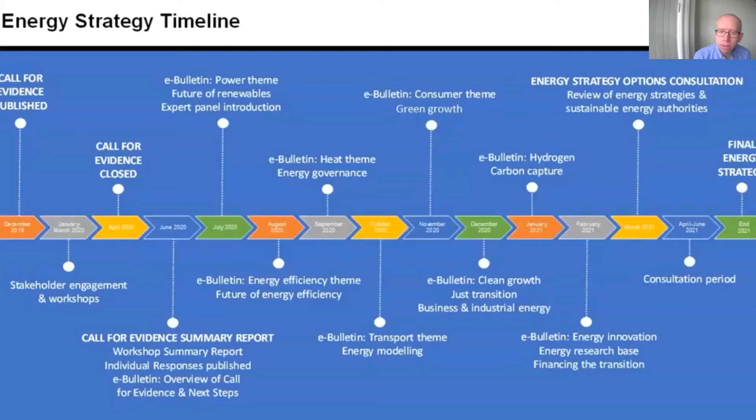Just to cover a few key issues we're looking at within it: the big area of success we've had over the last number of years has been in renewable electricity, where we've taken a power sector that was originally based on around 3% renewables and taken it to a position where it's at 48% in June 2020. That's a fantastic achievement, and it shows what good policy and collaborative working across government and with industry can deliver. That's a good example of the success we've had. We really need to build on that as we take forward the future energy policy in the energy strategy.

But we do have to be clear that power is actually a relatively small part of the energy mix—it's 16% of our total final energy consumption. Transport and heat are really important areas that need to be tackled through the energy strategy. Indeed, when we look at a breakdown of greenhouse gas emissions by sector, we see that energy-related sectors account for 66% of total emissions. That's why the energy strategy, why energy policy, is so important for net zero, because ultimately an awful lot of the heavy lifting will be done by the energy sector.

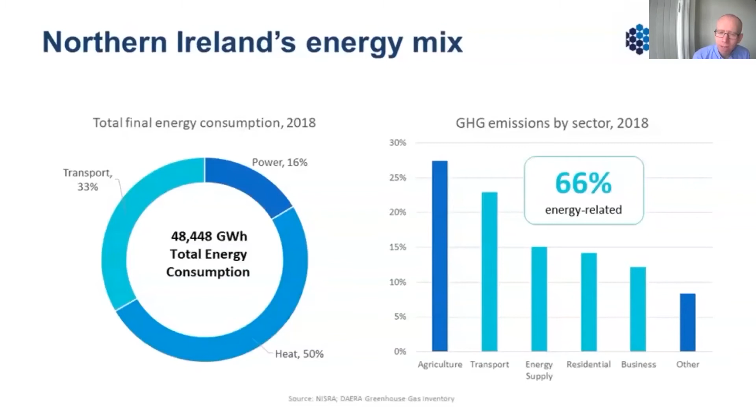I'd like to talk briefly about trends in emissions since 1990, because that's obviously a key overarching driver of the strategy. We have had success in Northern Ireland—we've seen a 20% decrease in emissions from 1990. However, from where we are now in 2020, we need a further 82% decrease in greenhouse gas emissions by 2050. That's an increase in the rate of decrease of four times what we've had in the past. That really gives a clear signal as to the scale of work, the scale of change needed to deliver on that. And that's why what we come forward with in a future energy strategy and future energy policy has to be transformational—it has to be ambitious, because otherwise we simply won't contribute to net zero by then.

We have had success, as I mentioned, in the power sector in decarbonising it, moving away from a power sector that was mainly based on coal to one based on gas and renewables. But as I mentioned, certainly heat—particularly in the domestic sector—and transport have been really stubborn sectors to tackle, and will be a really important part of any future energy strategy for net zero.

Now, this is a really important issue for us. If budgets were unlimited, this would be a much easier challenge, but we have to balance the need for investment, the expectation that costs will come from it, with the needs of consumers and taxpayers. I would like to make one point.

Costs, particularly when we talk about fossil fuels, that is a cost. We buy fossil fuels, we import it, it damages our environment, it provides the energy, and it's gone. It's simply a cost to Northern Ireland. However, things like renewables and energy efficiency are investments, actual assets we can draw from to create our energy. That's what a lot of the future energy system is going to be about—investing in things and trying to come up with the most cost-effective way to do that going forward.

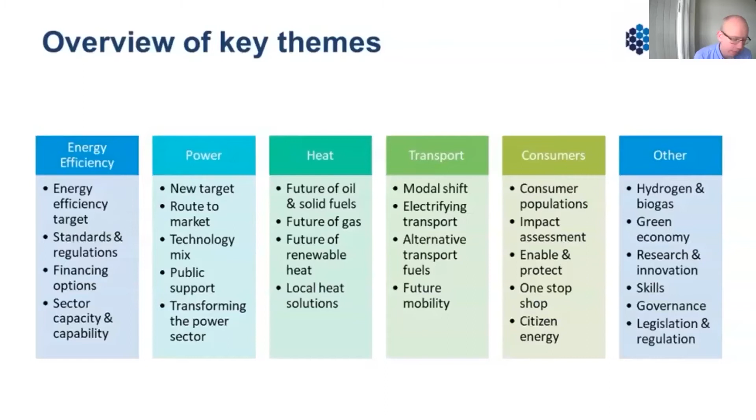So hopefully that has given you a bit of an overview on some of the strategic issues that sets the scene for the rest of today's session.

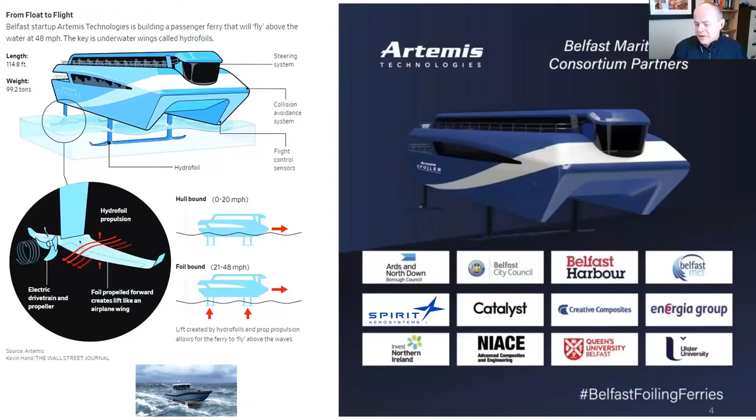In terms of actual technology, it's not just the hydrofoiling. We're also autonomously controlling these vessels. So just like an aircraft where the pilot puts in an input but doesn't actually manually control the plane itself, we're doing that on the vessel as well.

In terms of technology benefits, it's not enough to have a zero emissions vessel or vehicle. You want to actually bring added benefit to the consumer. So we have zero emissions, which is great for hitting the net zero target, but the vessel also has other benefits.

There's no wake to the vessel. You may think that's not important, but for those with long memories in Northern Ireland, I remember the HSS that used to go out of the harbour, and there was a wake issue on that vessel. Just like Concorde couldn't use its full speed until it was out of land reach, this vessel, because we fly it above the waves, has zero wake.

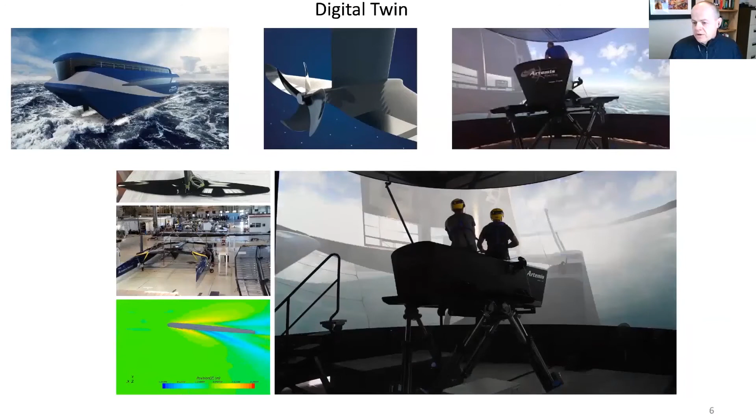To do that, we use a very complicated arrangement of simulation and simulators. We're bringing our world-class simulator, a full motion platform, human-in-the-loop simulator with hardware-in-the-loop real time, to Belfast, Northern Ireland. This is at the heart of our development process for the consortium, and it's actually what we'll be using to tune and optimize the vessel.

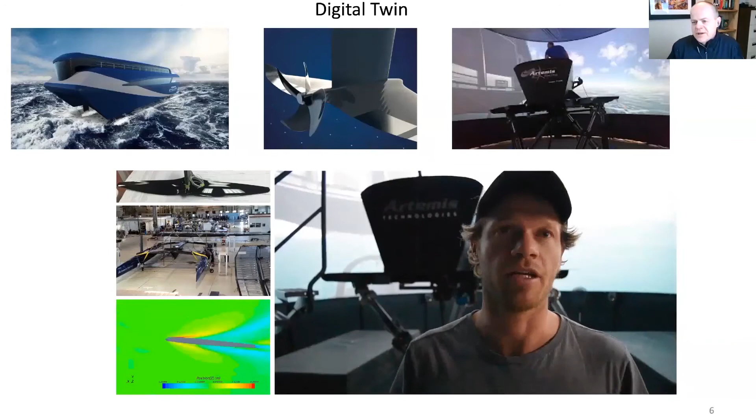So it's a mixture of digital twin design, composite engineering, hydrofoiling, energy recovery, and it's all going together to drive this program.

Just to finish with a few takeaways, this has been based on not just my Artemis experience but also at Innovate UK. If I was to list a few key points that we and Northern Ireland should be looking at: we need to be looking at bold asks, so we want to really move the dial, and we need to be a strong collective voice.

We need to collaborate. It's no good just working business to business. We need to work with national and local government, so devolved and central government, SMEs, large companies, universities, colleges, and research technology organisations, and look to expand across the whole of the UK and wider afield.

I'd say you want to play to our unique strengths and capabilities, with that transformative vision. It's no good just going to net zero; we also want to be driving certain added advantages to the consumer.

Also looking to play to the strengths of the region, geographical strengths and logistics. We looked at a number of places in the UK to site our venture, and Northern Ireland came up trumps purely because the deepwater port has an airport right beside it, has the universities and local infrastructure, businesses and skill sets within a 20-mile radius of where we want to put in, and that's really difficult to find. So I think we need to play to our strengths.

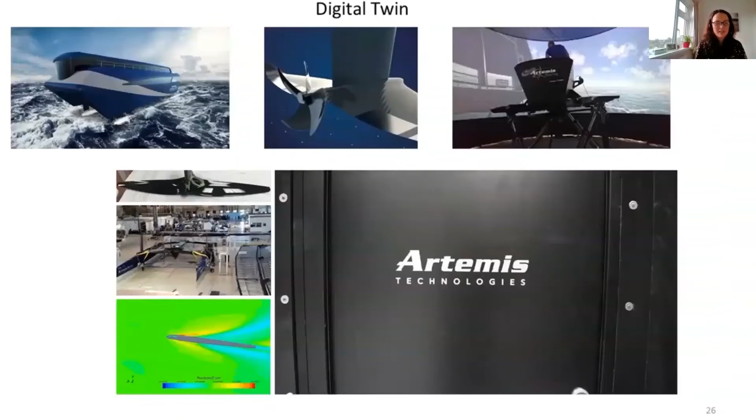So that's a really interesting presentation, and really great to see what's actually happening here in Northern Ireland, and hopefully within the next couple of years we'll be able to do some of the trial runs from Belfast to Bangor before it'll be going all over the place, but that'll be absolutely amazing, Mark.

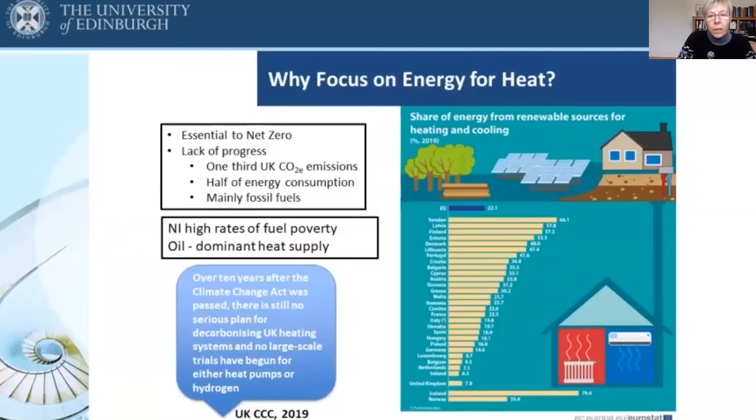We're also, in Europe generally, the UK, all parts of the UK, lag - in the wrong sense - well behind other European countries in terms of the share of energy from renewable sources for heating and cooling, as that figure there shows. We're well down at the bottom of the pack, I'm afraid.

So it's very understandable that this is extremely difficult territory for policymakers, but it is also critical. And unfortunately, of course, in the way that I'm sure most politicians and most of us, indeed as part of the general population, would appreciate, there isn't a silver bullet. There isn't a nice, neat solution that is easily graspable, obviously going to be cost effective and not have lots of perverse side effects from following through. So trying to avoid the perverse effects, the unintended consequences of any major shifts in heat sources.

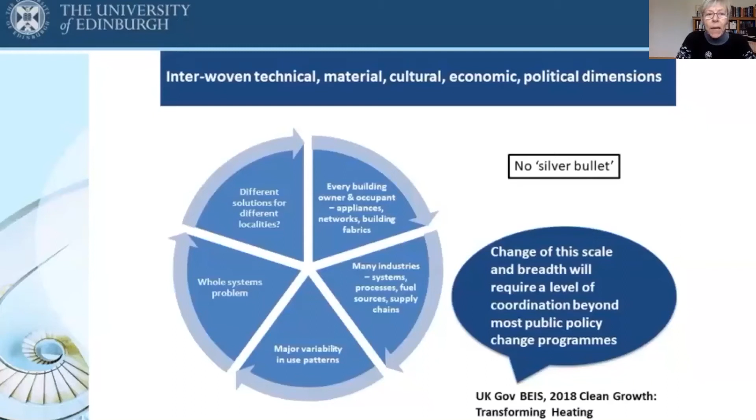It involves so many different aspects of the way we live. I would argue, as a social scientist, that the research and development agenda is as much a societal one as it is a technical one. We have many of the technical components for the solutions - established technologies like heat pumps, district heating networks, and biofuels, biomass to some extent.

We know a lot about the technologies and the systems for using them, but we're not really directly applying them at sufficient scale, through area-based, larger scale system demonstrators that bring together the technology, the networks, the people, and the businesses to look at how we manage that transition. Undoubtedly, it will involve some experiments, some failures, and that is, of course, very challenging.

So that balance of technology innovation versus application and improvement - with heat, I think we can do a lot with the technologies we have, but it really depends a lot on being willing to apply and improve and work at place-based scale with people to get the best results, and of course to handle the finances. Now I realise I'm posing a lot of hard questions rather than providing answers.

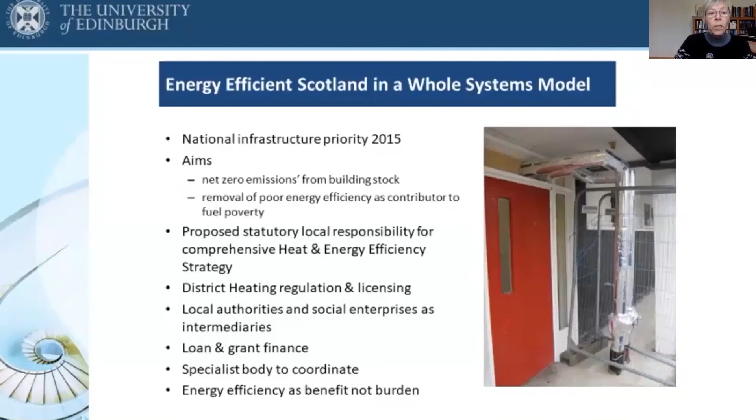And developing a specialist national body to coordinate the work. Really need to see energy efficiency as a benefit in the Scottish economy rather than a burden, an opportunity to create new jobs, new skilled work that stays local, that generates value for the local economy - in that sense, a big benefit.

So in conclusion, I would say decarbonising heat, not just in Scotland but across the UK, is increasingly on the to-do list. It's recognised as a push from the UK Climate Change Committee, but echoing Mark's previous comments about Artemis and low carbon transport in the marine sector, we really need to build societally that working consensus about the future direction of heat. That means cross-sector, bringing different parties together, talking particularly about financing and cost-sharing principles.

Who's going to pay for what, and when? To what extent should we be socialising the costs through general taxation, given that there are differential rates of benefit for different groups and different areas of the country, different places?

Critical factor is having trustworthy building bodies. Building trust is part and parcel of creating the sorts of changes in heat systems that we need. That means we need an independent coordinating and regulatory body, advisory bodies who can stand outside the immediate sector and business interests, so that people will trust that the standards being pursued can be guaranteed, and that they can have redress if something goes wrong.